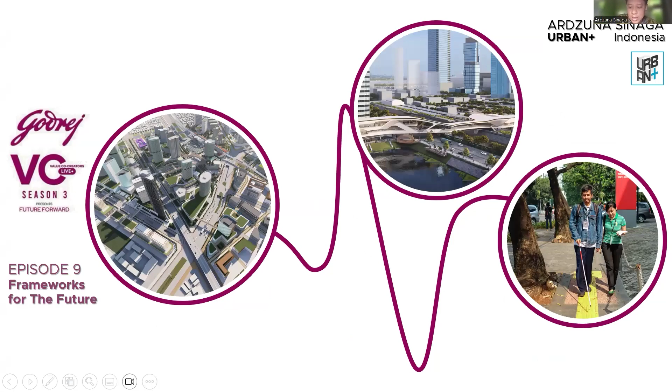So today I will share about my experience starting about 20 years ago. I'm the founding partner of Urban Plus, a multidisciplinary consultant. We focus on urban design, architecture, and landscape design.

We also work on various scales of projects. I've worked on very big scale projects such as new townships and even a new city. Together with all members of Urban Plus, we worked on the master plan of the new capital of Indonesia, the IKN.

Here you can see a various scale of projects, starting from big scale projects to medium projects such as mixed-use developments, up to very detailed and small projects such as architecture and buildings, and really just recently we did work with the government of Jakarta.

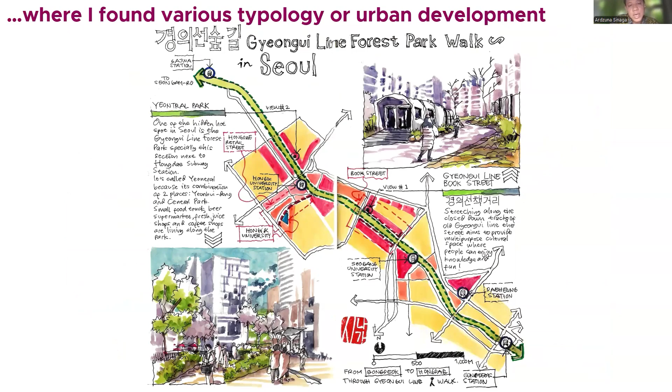I usually write it down and put it in notes like a journal, about how we can nail down and get a summary of whatever we've seen throughout our experience, and how to bring all the lessons learned as a reference to our way of doing projects.

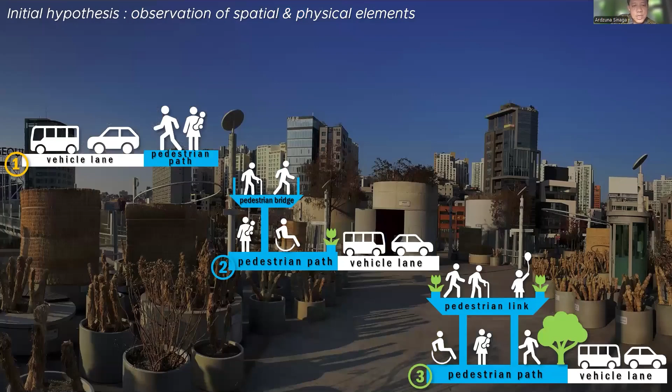From my perspective, even though it's only a pedestrian path as the physical element or basic infrastructure, there is an evolution in how it shapes itself in terms of mobility and movement of people. I call it Evolution 1.0: a very basic pedestrian path functioning as a sidewalk, usually separating the corridor for people from vehicles, motorcycles, etc. It becomes a conduit conveying the mobility of people along the corridor.

Then there's another progress, Evolution 2.0, as seen in the diagram, trying to separate levels and make it multi-layer. The pedestrian path gets a dedicated lane, which can be above or underground, purposed to separate the vehicle from the people. So in Evolution 2.0, we start to see a more advanced corridor for the pedestrian path.

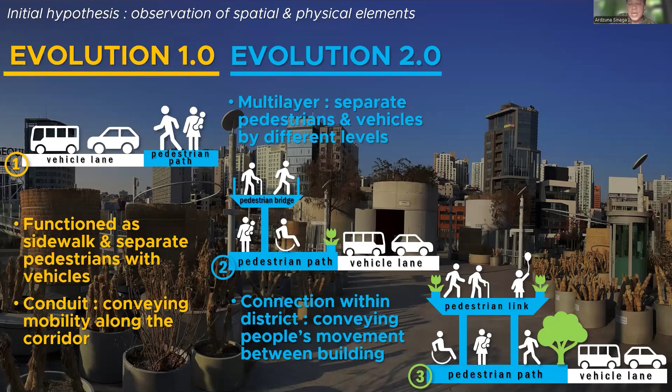The next stage is Evolution 3.0, where the corridor of the pedestrian path is no longer just a connection between places or buildings, but becomes a very big, long corridor connecting between districts and running along the entire city.

We can also make a differentiation in the provision scheme of evolution 1.0. As we see in a lot of cities, including maybe a couple in India, it's done by the public sector, the government. So it's a very basic infrastructure that has to be done, and it's just provided by the government.

But in evolution number two, I'm starting to see the private sector take a role in providing pedestrian infrastructure within the city. Even though the public sector still lays out the baseline infrastructure, the private sector starts to play a role, with a lot of connections happening between buildings or across different land ownerships. So in evolution 2.0, the private sector starts to take the role.

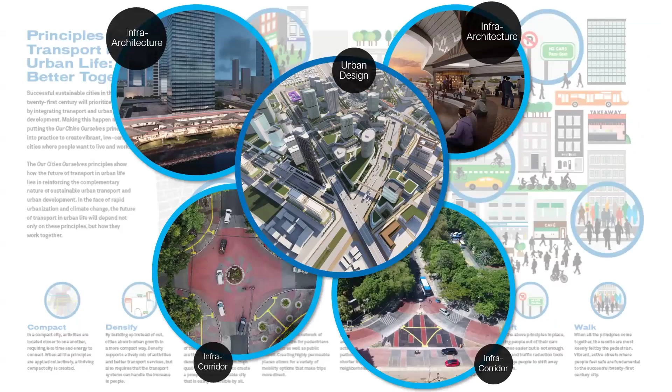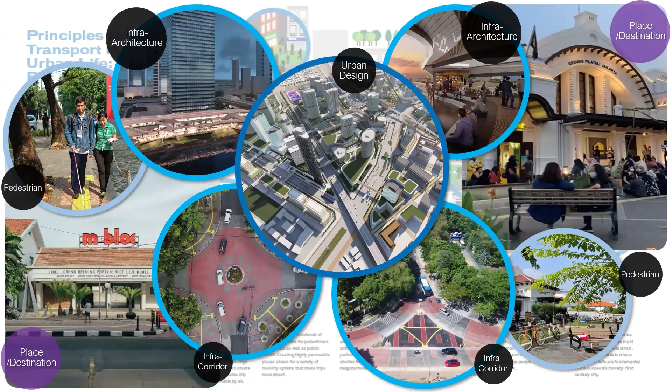From there, we can start to see what we did over the years, starting from 5 years ago, trying to shape up and make a complete frame of the TOD, starting from basic, very basic infrastructure. We started with doing a pedestrian path as the very basic infrastructure, which at that time, around 2016-2017, was still not in good condition for Jakarta city in Indonesia.

So we started with how to make a connection for pedestrians to connect to a transportation hub, and assuring how the first mile and last mile going to the station, going to the terminals, actually become a very good conduit for people to walk on. So creating the integrated urban framework is our very, very basic starting point, from the principles about integration, seamless connectivity, how to also put wayfinding, and also how to make a vibrant city by activating the face of the buildings.

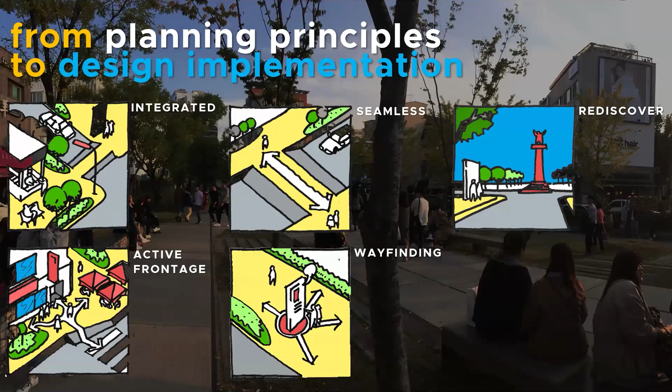We start with something very simple. This is one of our works from 2017, showing how we revitalized the pedestrian path. The condition before was not good, but then we started to make the path not just a conduit for people to walk on and connect different places, but also a space for activity.

As you can see, it can be a place for people to discuss, and a place activated by a lot of activity there. We were lucky to have the opportunity to do that when the movement was initiated by one of the material providers, a material producer, to sponsor the construction of the pedestrian path.

This photo shows how the pedestrian path also gives a more universal design, allowing even disabled people to walk around the city.

We also introduced a new paradigm, where the connection going across the road or street is designed to be at the same level. So for people wanting to cross the street, they don't feel they have to go down to the road level. Instead they walk at the same level going across the road, and can easily move here and there.

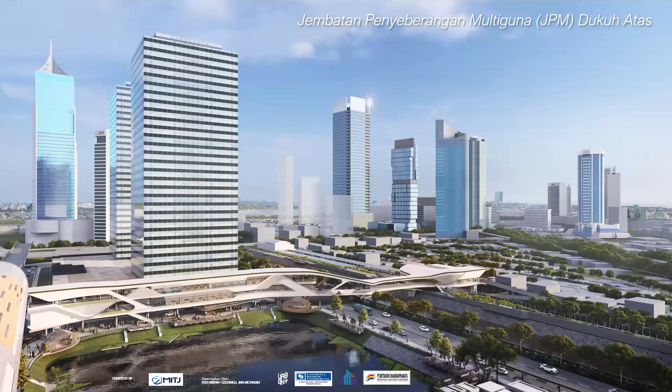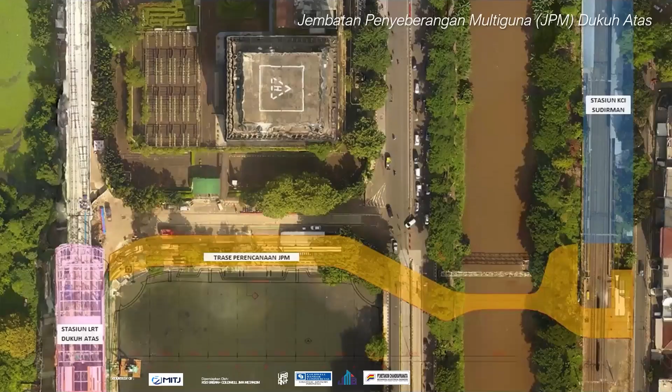This is another new approach taken by the government. Before, there was no bridge and people had to walk around, with many pedestrians taking cars to get around instead. By connecting those two stations along the road and crossing the river, we can assume the mobility between the two transport modes is getting much smoother.

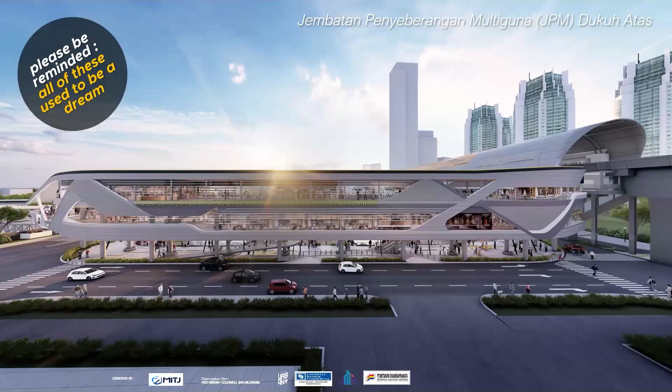So the design has to be tested and reviewed by various types of authorities. The city government has to review it, and also the Ministry of Transportation, because the bridge design actually goes along different spaces, different authorities. So this type of connection is actually another new type for Indonesia.

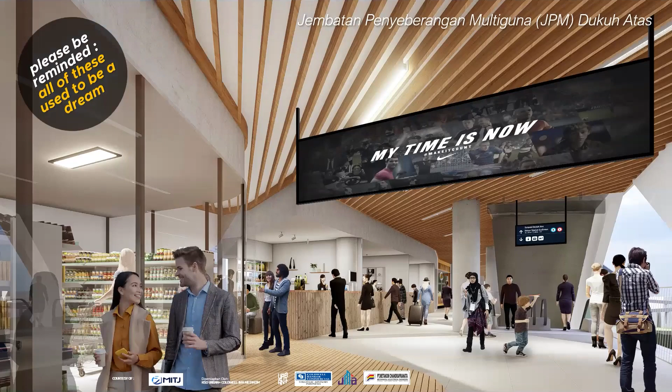When it got constructed, a lot of people started wondering what type of architecture or pedestrian bridge would take shape, because this is the first time in Indonesia. Once it was already built, I think around 2019, right before COVID.

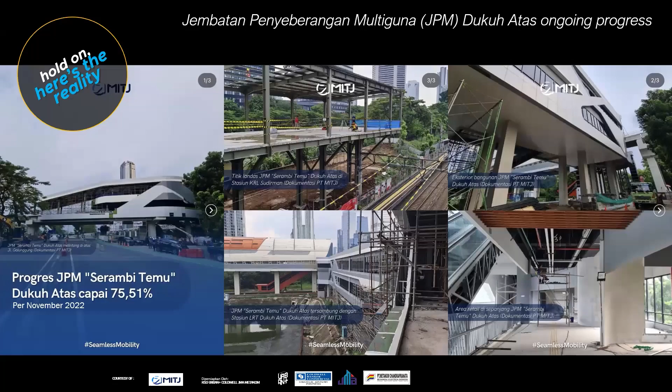At the same time, the operation of the LRT on the left side was starting to operate. At that time, the movement between different types of transportation became smoother, and it connected all of the stations in one area to become a complete TOD point.

So this is the next level we did that, starting from the ground, and then we started to connect different spots of the transportation mode. Then, starting from that second phase, we also started to think about how we revitalize the station itself, the train station, as you can see.

In the Dukuh Atas area, after we finished our pedestrian bridge on that side, we had the opportunity to be engaged by the National Railway Company to do a revitalization of the train station, integrating the station to become a full TOD connected by the bridge.

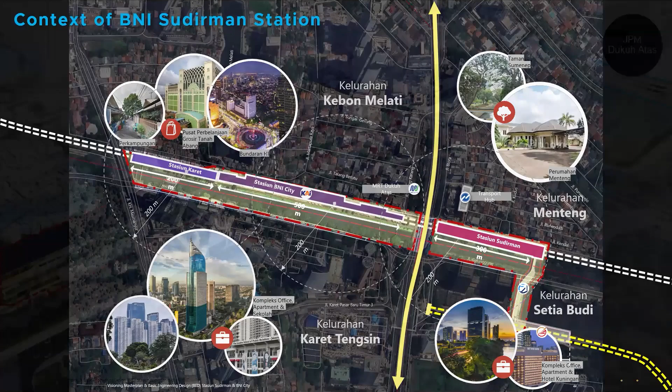This undertaking is quite massive, and we only got this sort of project after we approached the National Railway Company for quite a long time—almost 8 to 10 years—after proving that the interconnection, the framework between different stations and transportation spots, is very important.

Then we got the opportunity to integrate these three stations to become one station, so it can potentially bring more people along the train itself.

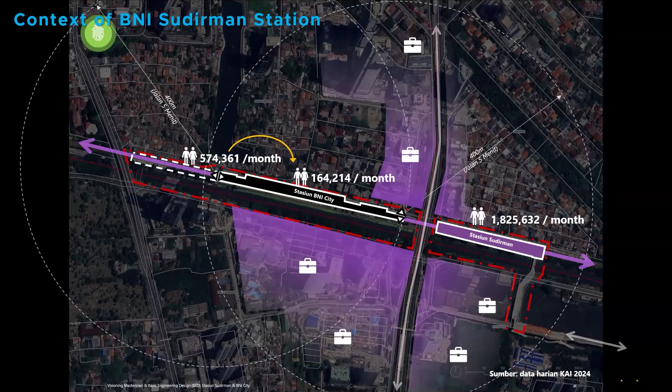So this project is still under ongoing progress. Now, after we designed the master plan, we are doing the design of the buildings of the station itself.

The station, as you see here, is not only the revitalization or integration of two different railway stations, but also trying to integrate different modes of transport between the conventional railway train connected to the MRT station on the left side.

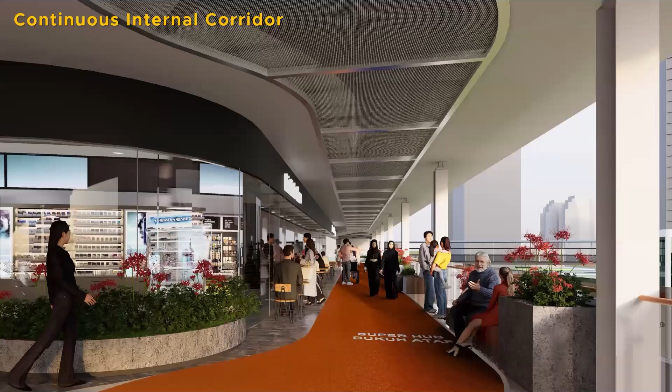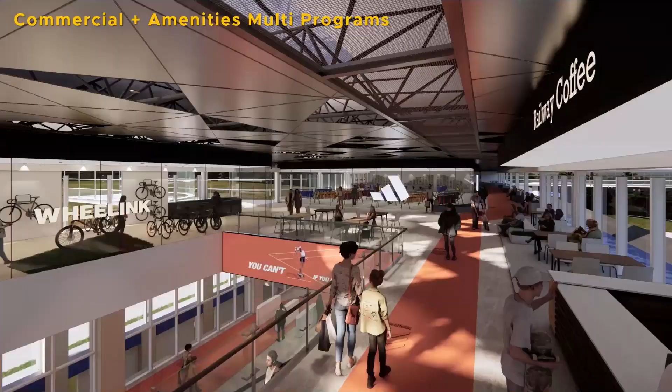This is what we are trying to do: make a public easement, a public corridor, going through inside the station and connecting with the other MRT station, and also going through another destination with the injection of commercial programs within the station itself—to make a statement that a station is not merely functional mobility architecture, but can also become an activity center accommodating various types of programs.

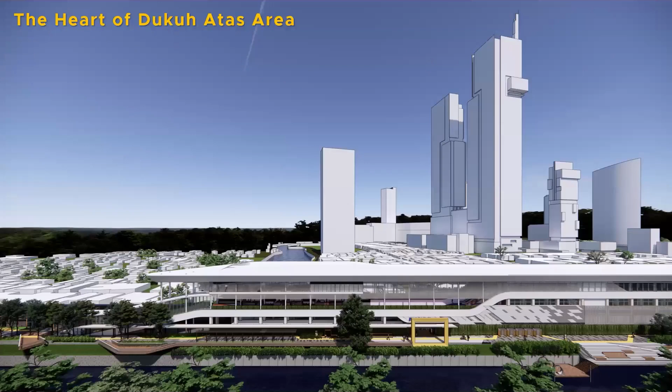So this undertaking hopefully can start construction this year. This is actually one of the projects that needs review by a lot of authorities and different parties, starting from the city government, the national government, represented by the Ministry of Transportation.

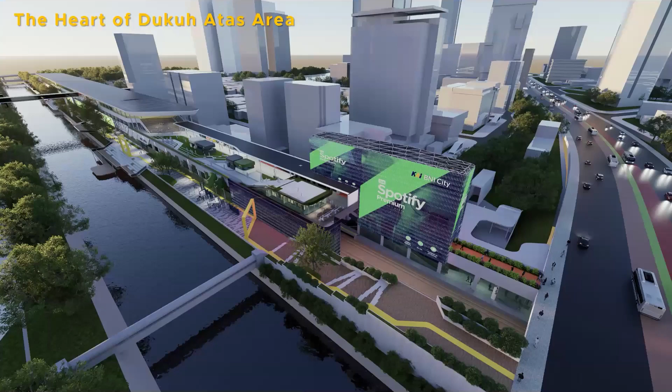And to actually make sure that all of the revitalization is not disrupting nature, because it's located next to the river, and it still is able to convey all of the passengers and bring not only passengers but also people to come to this spot and do activities within the TOD itself.

So from a very humble beginning where we worked on the pedestrian path—it doesn't look shiny, it doesn't look very fancy—but we are assuring the shifting of the paradigm for people to start to walk more, and also give motivation to people to easily move between different modes of transport.

Now we are starting to realize how the TOD can be not only the conveyor or conduit for transportation, but also become a center of activity in the heart of the city. So if we talk about the future framework of Jakarta, for the last couple of years, we can see more and more public infrastructure such as MRT and LRT actually being constructed.

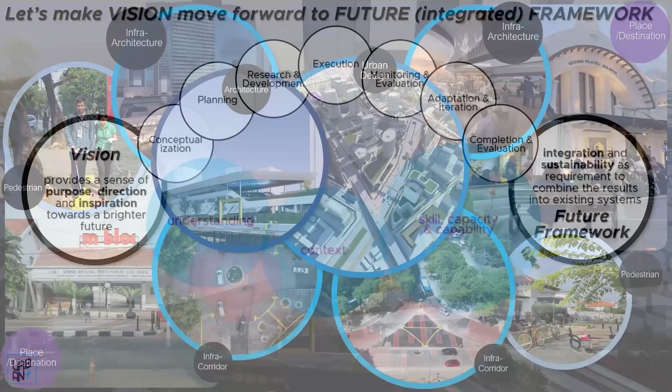But at the same time, we also have to assure that the movement between the different transportation modes can be done smoothly. So as we see in the very beginning, we start to see how actually the process from the vision itself can be realized for the future framework. We talk about integration and sustainability.

It's not only required an understanding of the context and the growing skill and capacity, but also we have to realize that the knowledge and thinking platform of the different stakeholders, especially from the transportation people, from the government people, from the city government officials, it also has to grow and improve their regulation rules and how to maintain the consistency of this effort.

Along the process, even though what I showed here is only maybe some of the built and done effort, actually going through the process there are a lot of stakeholders being involved, a lot of discussion with the public, public engagement, and convincing all of the city government people to put a lot of effort to make all of the contributing elements come into place.

So I think that's my sharing today, to show you how we're trying to make a better city, and we've put in quite a long effort, almost 10 to 15 years, just to assure that all of the growing development in Jakarta city and in Indonesian cities broadly is undertaken in a sequential and proper way. Thank you for your attention, and that's the end of my presentation.

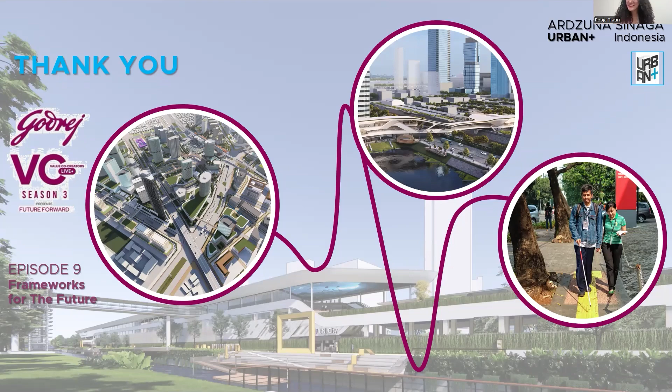I have to say it was quite an insightful presentation. And the last slide you mentioned, which spoke about the vision to the future framework, I think it completely explained the entire presentation, how you started with the vision and how beautifully you're working for the future framework. So thank you very, very much for that.